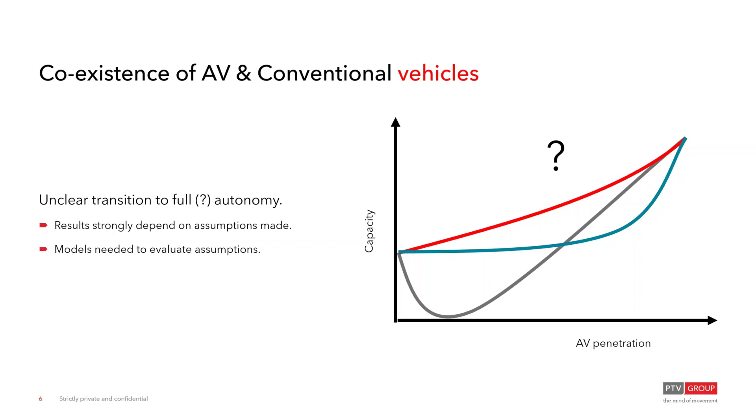Now, we need models to evaluate those assumptions, and really, as part of this Coexist project, it was identifying how we can take some of those assumptions that we currently have and provide a little bit more certainty about them. So how we can actually understand a little bit more about how those vehicles would drive on the road, how they would interact with other vehicles around them, and how they would also interact with infrastructure. So how they would accommodate merging activities, stopping at traffic signals, changing lanes, and so on.

Okay, so as I mentioned before, there were a number of cities also involved in the Coexist project, and these cities are spread throughout Europe, and they look at different aspects of the modeling tool that we're developing. So here we have a certain number of cities that look at the microscopic aspect, so the individual characteristics of how vehicles drive, and then some cities that look at the macro perspective, so how the behavior of the vehicles can affect the wider traffic flow at a more macroscopic level as well.

So let's look at a few of the individual characteristics of each of those cities which are part of the project. First of all, we'll run through Helmond. Now, Helmond is the location of one of the project partners called TASS, and in Helmond is actually the test track for autonomous vehicles. So this is where we used the facility to test how the autonomous vehicles drive on the road network. And this allowed us to look at different penetration rates, but also some of those infrastructure aspects.

So looking at how vehicles interact at urban traffic junctions, things like vehicle-to-infrastructure communication, vehicle-to-vehicle communication, and also interactions within mixed traffic. So the coexistence of human-controlled and autonomous vehicles on public roads, so that we can record that. And the information that we got from that was fed back into our simulation model as well.

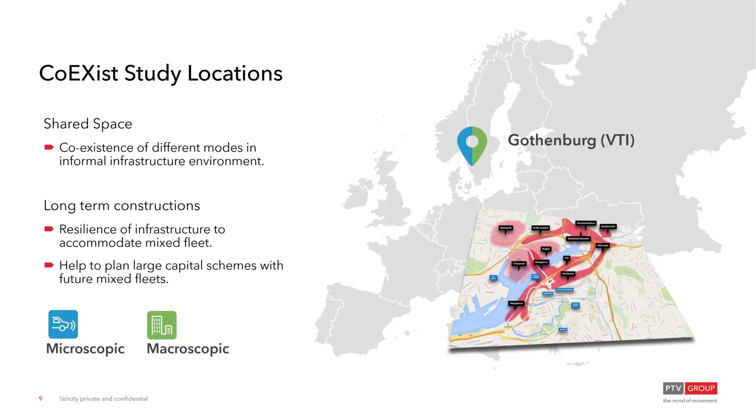And also in Gothenburg, looking at some of the longer-term construction as well. So whether or not the existing infrastructure is resilient enough to accommodate a mixed fleet. So maybe in a horizon year of 2030, with autonomous vehicles, will there be enough capacity in the road network? Will the arrangement of some of that road network need to be changed in order to accommodate the vehicles and the level of penetration rates from autonomous vehicles that we would experience?

Okay, on to Milton Keynes, and Milton Keynes was looking at quite a specific, micro example of how to operate pick-up and drop-off activities. So vehicles pulling up outside buildings, passengers getting out, and then those vehicles driving themselves to a parking lot or parking garage, parking there, and then coming back to greet the passenger once they've finished their activity, and the types of technology that need to be included in order to accommodate that.

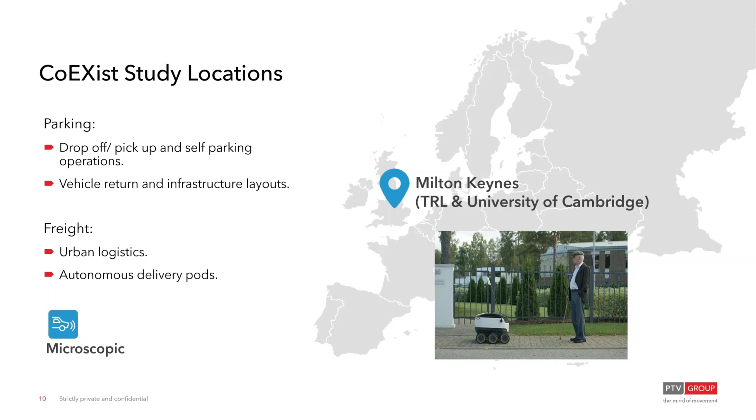Okay, and the final location is Stuttgart in Germany, and this was focused very much on the macroscopic aspect. So this is looking at the capacity of the network with mixed fleets, and also the designation of roads and routes to certain types of vehicles.

So whether or not there's a segregation of autonomous vehicle only lanes or autonomous vehicle only roads within a city, and how that would actually affect other traffic flow, and how we might also look to influence some routing and journey movements that people make depending on the type of vehicle that they're using. So whether it's a human controlled vehicle or an autonomous vehicle as well.

Also, ride-sharing systems are considered as part of the Stuttgart study. So this is where we look at car sharing, public ride sharing, how perhaps these types of modes can be used to support mass transit. So again, kind of first and last mile trips, which would support higher capacity public transport services as well, which really feeds into those kind of multimodal trips.

So the fact that people may well leave their home, they take a shared bike to a station, then take a public transport train or bus service, and then when they reach close to their destination, they again take another micro-mobility mode in order to get to their final destination. So maybe an e-scooter and so on as well.

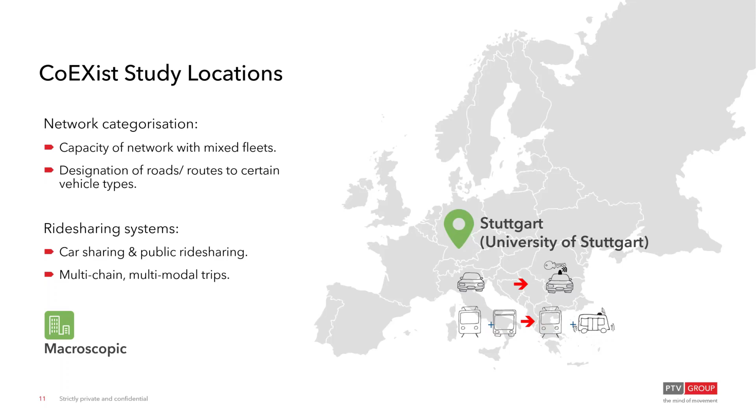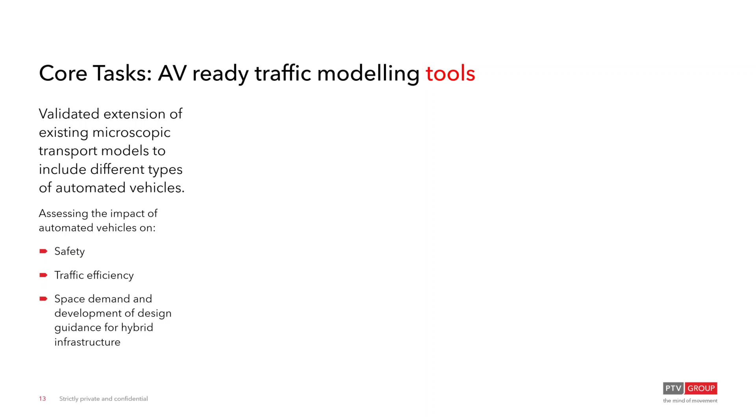Okay, so that was a quick overview of how the different study locations would actually operate and use the functionality that we were developing as part of this study. And now I just wanted to quickly run through some of those core tasks that PTV were heavily involved in as part of the project. So we have the role to make AV-ready traffic modeling tools.

And this really is where we take our existing simulation tools and we extend those simulation tools in order to accommodate automated characteristics within that. So we have our microscopic transport models, we extended those to facilitate different types of automated vehicles. And from that, we looked at aspects such as safety, traffic efficiency, and then clearly the demand or the space or the capacity of the road network, which then could be given as a guidance for hybrid infrastructure.

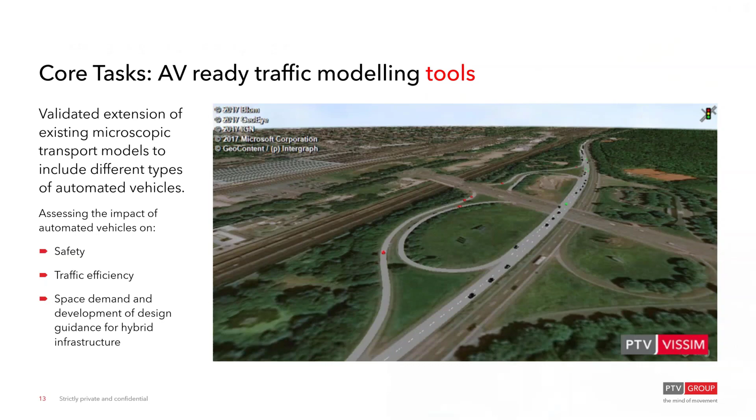So we created a real-time connection between the autonomous vehicle control logics and our microscopic modeling tools. So we have a live digital twin of this area, which is running in simulation and uses the same AV control logic that is being used in the vehicles that are actually driving along that public road. So we can test further scenarios, perhaps add some extreme behaviors to how those vehicles are driving, and test those out in simulation before we actually operate the vehicles on the public road itself.

As part of that process, we looked at developing a set of model-based default parameters for AVs, as well as passenger cars and light-freight vehicles. And that would allow us to provide functionality in the software where road authorities, but also traffic engineers and consultants around the world, could take these default behaviors and integrate them into their own projects.

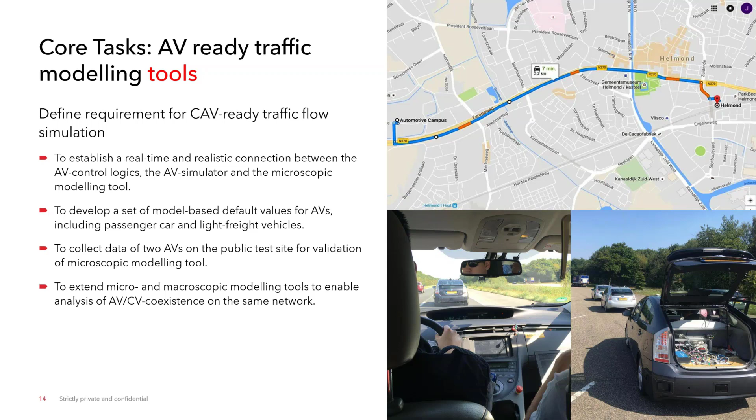So we ran the vehicles on this public test track and we extracted results from them. The vehicles were tested with a number of sensors, LiDAR and radar sensors on them. We also had GPS tracking so that we could take the trajectory of these vehicles, so how they were driving, also the speed, the acceleration, deceleration, and so on.

Okay, so from this data, we looked at taking our test track data and then improving some of our interfaces that we have within our software. So having some additional APIs that allow us to operate AV control algorithms within that test bed. So where we use simulation to create a digital twin of a test track and then testing specific AV control algorithms. So that's looking for use cases that focus around automotive manufacturers, OEMs, and researchers.

And then, as I mentioned before, the internal approach where we have an improvement to our AV behavior, where we're providing a default autonomous vehicle driving behavior within the software, which can help transportation engineers, planners, traffic engineers, and so on, to start to test some of these scenarios, to reduce some of those assumptions that we need to make and look actually at how we need to perhaps amend the design of our intersections in order to accommodate varying penetration rates of vehicles. Perhaps we need to add some flexibility into our design in order to ensure that the junctions still operate as we would like them to in a transition period between human-controlled vehicles and automated vehicles as well.

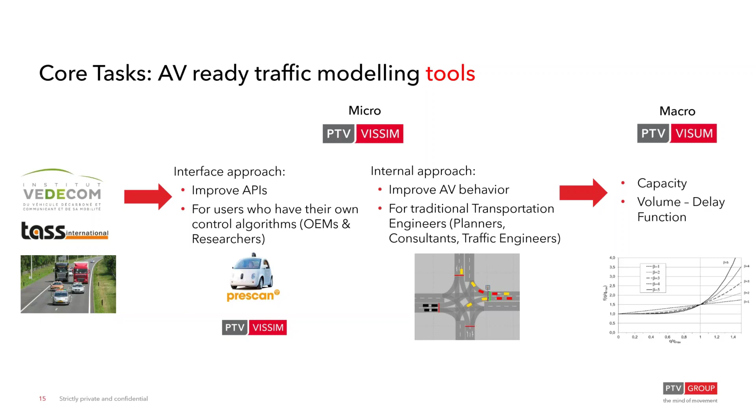Okay, now I showed you before the public test track, and you could see how that test track was along a certain corridor from the facility of TASS into the city, and that that test track included a number of intersections within it. It also had some merging sections and other infrastructure which autonomous vehicles are going to need to negotiate and to deal with when they're implemented on public roads.

And as part of that, we also had a number of scenarios about how the vehicles themselves operated. So we would change the following order of the vehicles. So sometimes we would have the autonomous vehicles following a human-controlled vehicle so that we could see how it would react in this way. We would have an autonomous vehicle following a connected autonomous vehicle, so that the following vehicle wouldn't be able to communicate with the vehicle in front of it, but the vehicle in front was connected, perhaps to infrastructure, to other aspects.

And we ran a number of scenarios along our public test track where we were altering the order of these vehicles, altering the configuration as well, in order to give us a robust set of data and a robust vehicle trajectory that we could then actually start to influence and to build our autonomous vehicle logic in the software itself as well. And we also looked at some of those predefined time gaps as well. So this is looking at how we could vary the following distance between each of those vehicles, the time that vehicles would react on others, and so on.

Okay, so now I'm going to run through some of that trajectory data, some of the outcomes that we actually took when we recorded these vehicles on the public test track, and how we've then taken that data and integrated it into PTV Vissim, which is available for our users now. So first of all, looking at some of that test track data outputs, we were very interested in the difference between some of the following behavior of vehicles as they were traveling. So looking at variation between the non-connected and connected scenario and how those vehicles react.

Now, if we look at the chart on the right-hand side, what we can see here is that as vehicles increase in speed, and they are not connected, so in the scenario which is demonstrated with the black line through the vehicle graphic, we can see that when vehicles are traveling up to speeds of 120 kilometers an hour, the distance between the vehicles is between 35 to 40 meters when those vehicles are not connected. And if we look at the delta velocity, we can also see that there is oscillation between how those vehicles are accelerating in order to close that gap up to the vehicle in front of them, or let that gap grow as well, because these vehicles are not connected, so they are reacting upon the action of another vehicle.

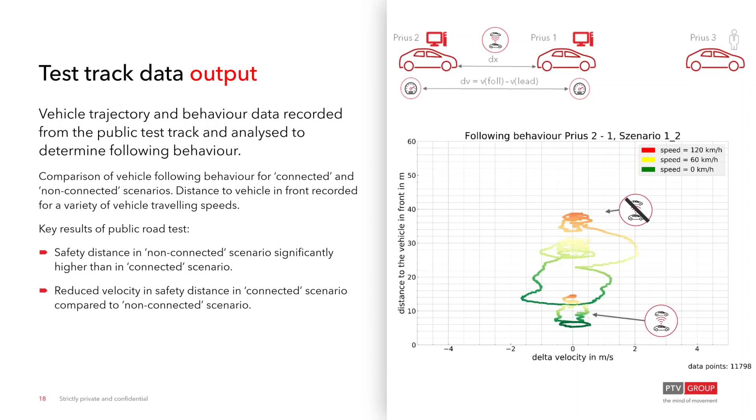So you can see the difference between standstill distance, which is around 5 meters, up to following distance at 120 kilometers an hour of 15 meters, really showing that there isn't a lot of variation as the vehicles travel faster. So this was part of the trajectory data that we took from the simulation, from the public test track.

And if we then looked at how that would compare to some of our default driving behaviors that we have in Vissim. So for those of you that are familiar with the software, you know that Vissim utilizes something called the Wiedemann car following behavior. And the Wiedemann car following behavior is a psychophysical model which looks to replicate the human nature of people driving.

So if we look at the chart at the top of the screen, you can see that when we were running our scenarios of our autonomous vehicle, there was a very linear relationship between the speed that the vehicle was traveling at and the distance to the vehicle in front of it. So as the speed increases, so does the distance, the gap between the two following vehicles.

Now, if we compared that to our default behaviors in Vissim, we can see that there's a lot of oscillation. So the lines look quite messy. There is a general trend where there is also that relationship between as speed increases, so does distance. But you can see by the circular nature of some of those lines that there's oscillation.

Now, this wasn't really a surprise to us because, as I mentioned, Wiedemann is a psychophysical model. So it looks to replicate the way that we drive. And often human drivers will find it difficult to follow a vehicle in front of them with an exact distance.

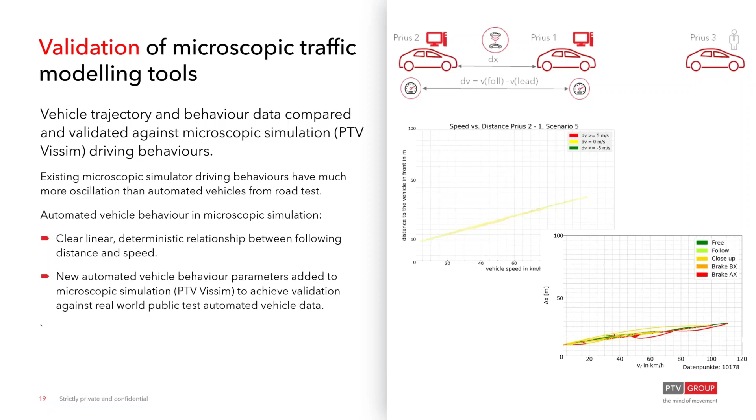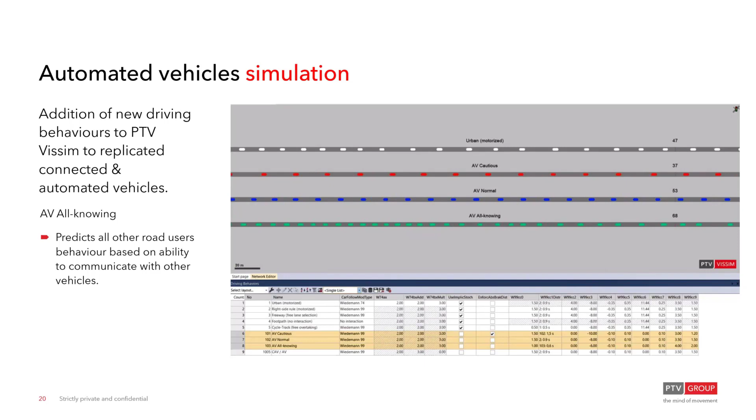Okay, and again, for those of you who are users of our software, you can see within the list at the bottom, we have made the parameters that we've changed publicly available. So you can understand the scale of the changes from defaults that actually affect this type of behavior. So understanding if you change a value by a certain percentage, what that could actually look like within your simulation model as well. And as I said, all of these behaviors and following distances and those parameters that you see at the bottom are as a result of calibrating those vehicle trajectories from the actual test track as well.

Okay, the other thing that we needed to influence, because as I mentioned, we ran scenarios where we were altering the control of vehicles from being connected to just being automated, meant that we actually needed to also influence the software where it needed to recognize the type of vehicle that it was following and then adjust its behavior based on that. So here we can actually see that playing out in a simulation where we have autonomous vehicles and we have connected autonomous vehicles.

And as you can see, the autonomous vehicles are following the connected autonomous vehicles with quite a small gap, whereas the connected autonomous vehicles are leaving a bigger gap when they are following autonomous vehicles as well. So it's actually being able to influence and vary the following behavior depending on the type of vehicle that is leading or the type of vehicle that's in front.

So that is particularly interesting for things like platooning, where perhaps we would have large freight vehicles, heavy goods vehicles, and so on, and actually being able to influence the behavior of following vehicles, where you could perhaps potentially have mixed platoons of vehicles also operating on interstates and expressways and so on.

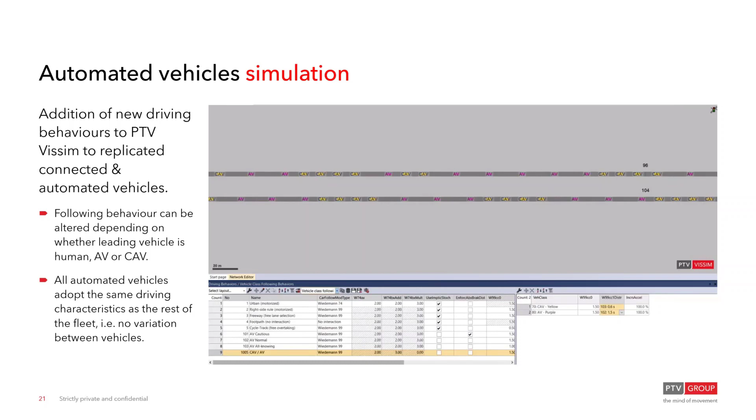Okay, so now a little bit of information for what those parameters actually mean within the software and those that we've changed as well. So the first one, as I mentioned, is that we have added a parameter that is called enforce absolute braking distance. And this is where the following distance of the vehicle is defined by the braking distance and the standstill distance. So ensuring that if a vehicle were to stop abruptly, the vehicle that is following would also stop before it came into contact with that forward vehicle as well. So this is now an option that is available as driving behavior, a checkbox that can be implemented, and the impact will be that it will have a safe application within the software.

So you will see that capacity, for instance, would drop because the vehicles are following each other with a larger distance than perhaps we would expect before, and that's to replicate perhaps in that transition between human-controlled and automated vehicles, the safe aspect as well.

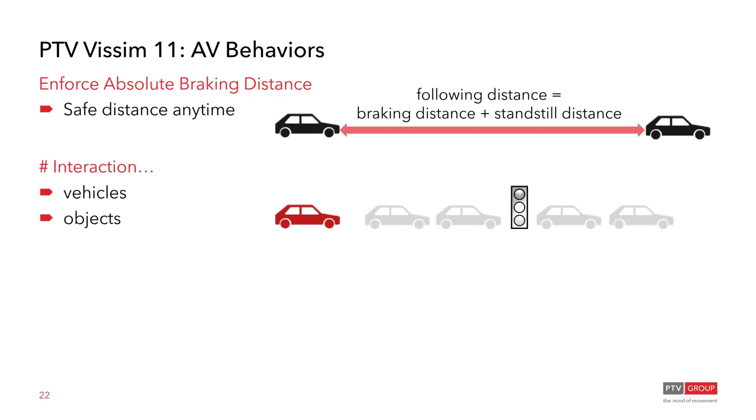We then have varied the number of interaction objects that the simulation can see. So previously, the way that Vissim dealt with upcoming objects was that we could define the interaction objects, and that would cover both infrastructure as well as vehicles. So for instance, as you can see in the diagram, if that value were to be set to 4, it would just accommodate the 4 objects that are in front of the vehicle. So it could be 2 vehicles, then a signal, and then a vehicle in front. Instead of a signal, it could be a speed limit change, and so on, just different aspects of the actual infrastructure.

So the addition that we've made is being able to specify between objects and vehicles. So now we don't have to have a matching value for both, but we could actually have number of interaction objects and number of vehicles separately as well. So the idea there really is that perhaps we could have an automated vehicle which can see a signal head because it has vehicle to infrastructure communication enabled, but it maybe could only see 1 or potentially 2 vehicles in front of it because the sensors couldn't see through the leading vehicle.

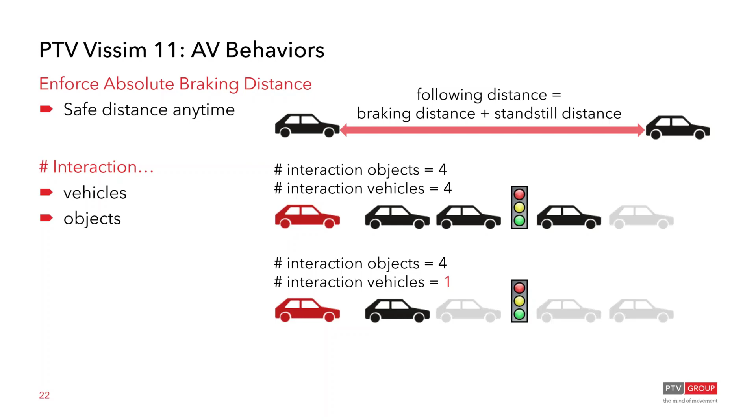So for instance, here we may well have a mixed fleet where we have human vehicles and other automated vehicles. It could be that our connected autonomous vehicle is following another connected autonomous vehicle, but then there's a human controlled vehicle that is in between them and the traffic signal. So therefore it can't communicate with all of the vehicles in front of the signal, and therefore needs to maybe leave a bigger gap, and so on as well.

Okay, you saw in the simulation how we can also vary that headway or the following distance depending on the class of the leading vehicle. So this could be that variation between autonomous vehicles and connected autonomous vehicles following human-controlled vehicles, allowing them perhaps to leave a bigger gap because human drivers are a little less predictable. Also, autonomous vehicles perhaps following larger vehicles. So, as I mentioned before, large freight vehicles, delivery trucks, and so on. So being able to apply those different behaviors to different aspects and different vehicle types as the simulation is running as well.

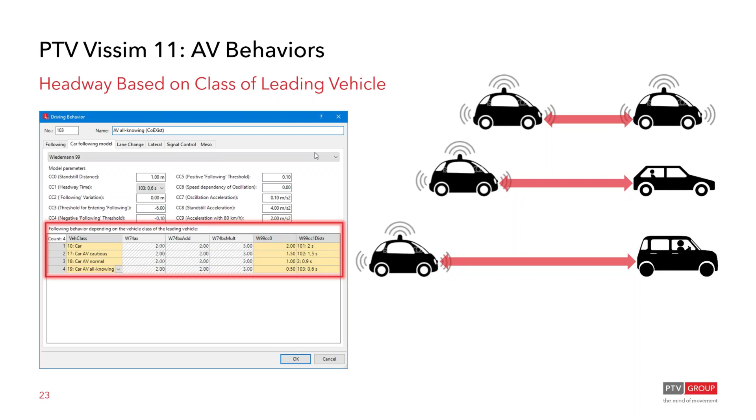Okay, another key aspect is taking away some of that randomness that we saw. So when we looked at those Wiedemann parameters and the Wiedemann oscillation of following which exists within Vissim, you could see that when we needed to replicate the autonomous vehicle, we needed to take away some of that randomness. So we can also remove some stochastics from our simulation. So this is an element of randomness that reflects our human behavior as well. And that means that certain distributions can actually be removed.

So again, assuming that vehicles, when they are automated, they would travel at a specified speed because much like cruise control in modern vehicles, you can travel at a steady speed rather than a human driving, perhaps always having to maintain their foot on the accelerator pedal and perhaps applying a bit of pressure, then easing off. That actually gives a distribution of speed, whereas automated vehicles and other advanced driving assistance provide the ability for vehicles to travel at a constant speed. So being able to actually influence some of those stochastics has also been built into the simulation as well.

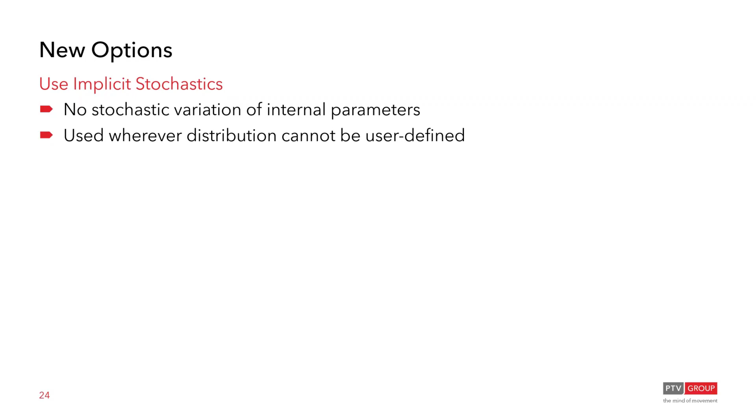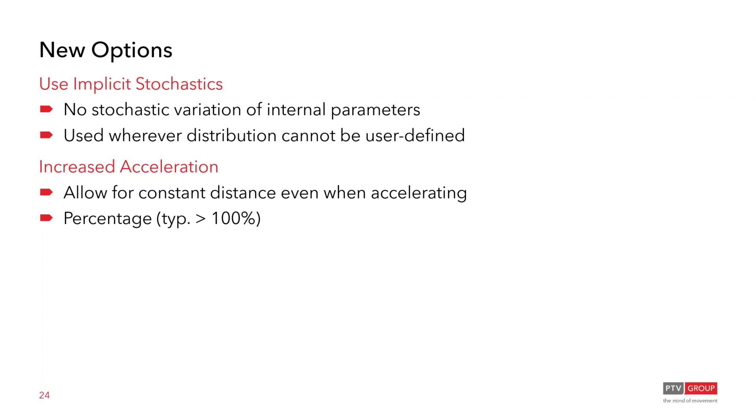We also then have increased acceleration, and this is particularly interesting when we look at some of that trajectory data as well. Looking at when we have vehicles pulling away from a traffic signal, for instance, if vehicles are automated but not connected, again, a vehicle will pull away and then the vehicle behind will have to react on it and then accelerate. And maybe it accelerates at a faster rate in order to close that gap up again. Likewise, when vehicles are connected, they need to pull away together to maintain a consistent headway. And when that happens, we also need to facilitate increased acceleration as well, so that we can actually have those two vehicles following each other at a constant distance. Okay.

And another feature that was added was that we can actually set the occupancy of vehicles to 0 as well. So for those people that need to run simulations where perhaps the number of passengers is important, so looking at how services might operate in a city, picking up and dropping off. Currently in PTV Vissim, we would always require an occupancy of 1 because there would be a person driving that vehicle. But in the functionality that's been added, occupancy can actually be set to 0 to replicate that automation as well.

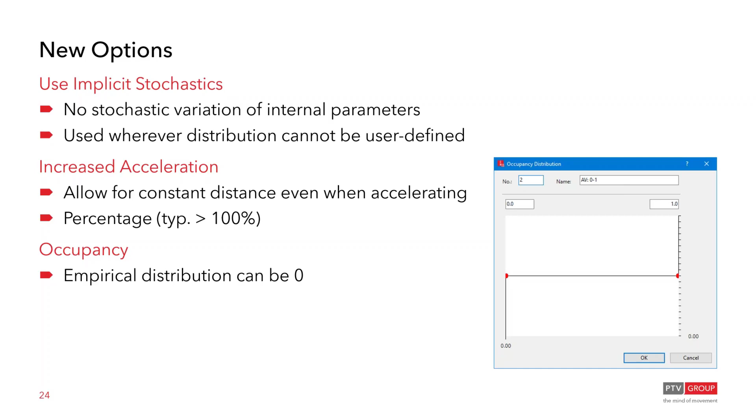Okay, so just to summarize really the next steps that are involved in Coexist and also what we've been doing with the software as well. So the next steps for Coexist are that the 4 partner cities are now taking the functionality developed in the software and applying it to their own infrastructure.

So going through that process of testing their existing road infrastructure within their cities, looking at different levels of automation, looking at different penetration rates, consumer acceptance of those technologies, and identifying whether or not their infrastructure, their traffic signals, their on-ramps, their merge areas, and so on, can actually accommodate the new behaviors that we've seen as part of our real-world autonomous vehicle testing as well. And undertaking that assessment and looking at whether they need to make changes to their infrastructure as well.

And here at PTV Group, we are also extending our automated vehicle technology. So we're also looking at developing platooning, so how we can more effectively platoon vehicles within the software, again, having that as a default functionality where people can simulate quite easily the impact of platoons, varying the size that those platoons are, varying the type of leaders, the speed that those platoons actually have as well.